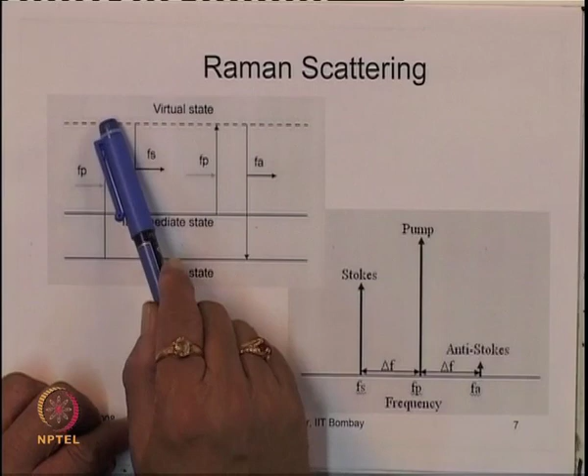So let us look at the very basic phenomena of Raman scattering. The Raman scattering phenomena is as follows: if you consider a material which has energy levels, you have a ground state, a virtual state, and intermediate states which are essentially vibrational states. If we excite the material from the ground state to this virtual state, these excited electrons will jump to this vibrational state, and in this process a frequency is emitted.

This emitted frequency is smaller in value compared to the excitation frequency, and the difference in energy is essentially fixed. That means there is a fixed change in frequency compared to that with which the material is excited. So this frequency at which energy is supplied to the material is called the pump, and the frequency at which energy is released is called the Stokes.

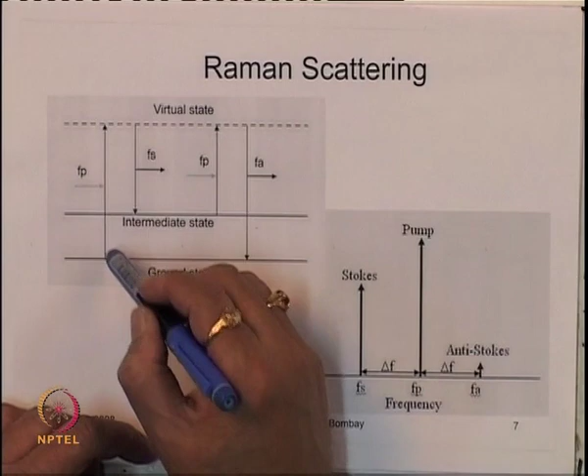Of course, it is not that the entire energy gets converted into this frequency. About 10 to the power minus 6 of the total intensity of the light impinging on the material comes out in the form of the Stokes frequency.

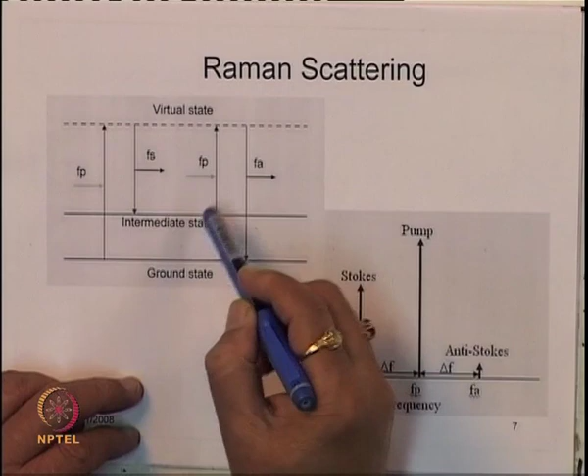There is also a possibility that if energy is supplied to the material corresponding to this frequency, and if you can make this transition possible, then one can get a frequency which is called the anti-Stokes frequency compared to the pump. This frequency will be of higher value, again by the difference corresponding to the energy difference between the vibrational state and the ground state.

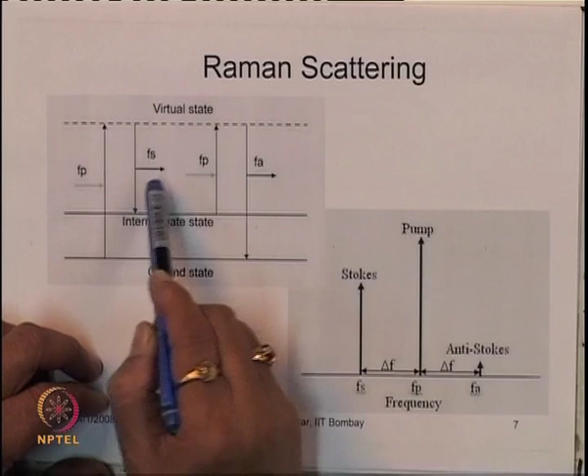So that is the basic phenomena of Raman scattering: if a material is exposed to a beam of light, a small fraction of that energy is converted into frequencies which are the Stokes frequencies, or the frequency is downshifted compared to the incident frequency by a fixed amount corresponding to this energy difference.

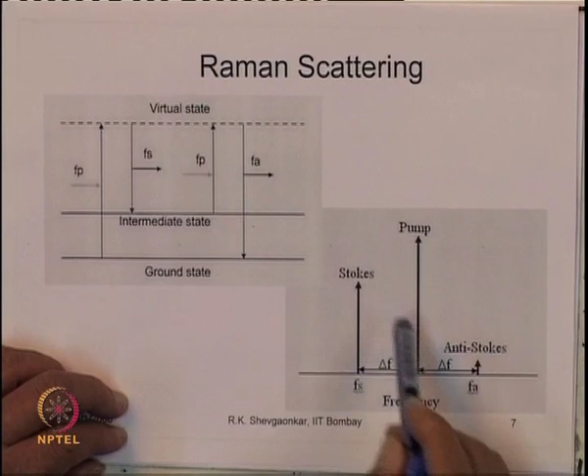So if I look spectrally in the spectral domain, if I excite the material with this pump frequency, we get a Stokes frequency generated which is smaller than this, and this decrease in frequency is a parameter of the material, because it corresponds to the energy difference between the vibrational state and the ground state.

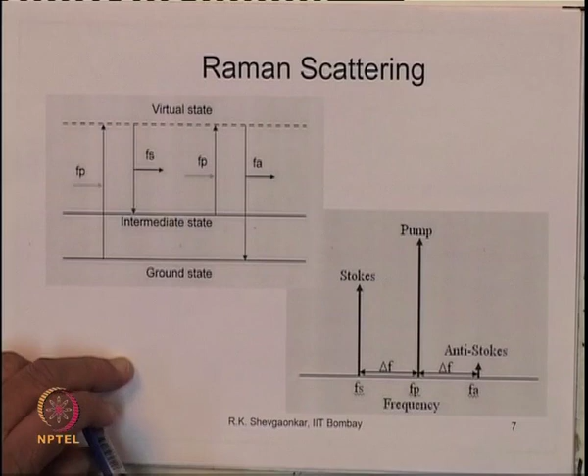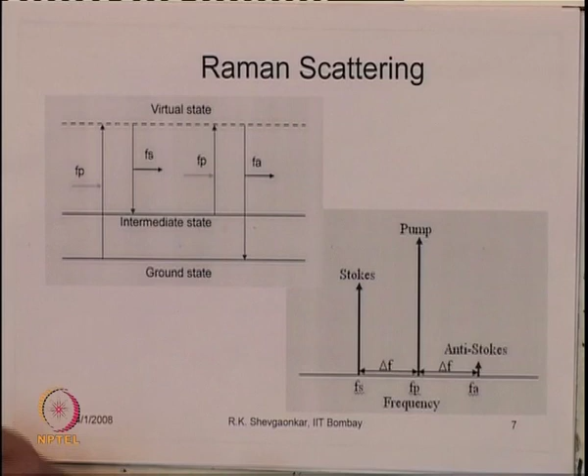Similarly, if you could excite this mechanism, one can create the anti-Stokes, for which the frequency would be higher compared to the pump frequency. Of course, the Stokes mechanism is more easily realizable; the anti-Stokes requires special systems. We are going to focus essentially on the Stokes mechanism.

That means if the material is exposed to a pump, we will generate a frequency which is the Stokes frequency, downshifted with respect to the pump frequency by a fixed amount. This difference, as we said, is decided by the material. So every material has this frequency fixed, which is a characteristic of the material.

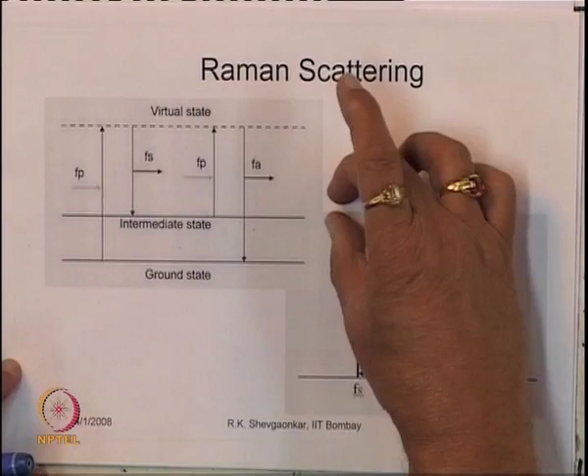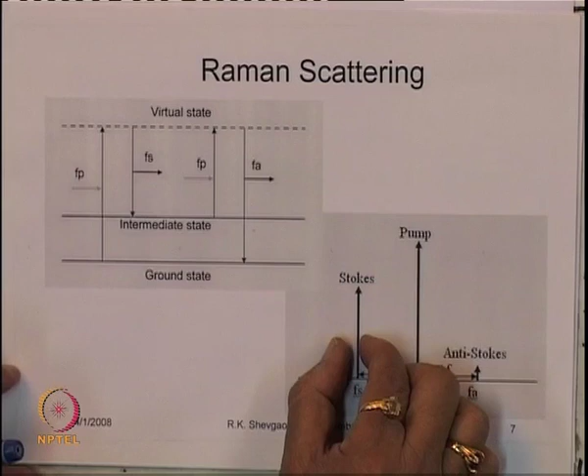If I look at the material glass, you will see that the vibrational energy states are not as discrete as shown earlier; actually it is a band. So it is more like a diffuse band, and this transition can take place anywhere within that band. So we do not get a monochromatic frequency even if the pump is monochromatic; instead we see a band of frequency generated when the material is excited with a monochromatic pump.

Now since the frequency we are interested in is not an absolute frequency but a relative frequency with respect to the pump, one can get a relative spectrum for Raman gain. So the frequency characteristic, the gain spectrum of the Raman process, looks like that, and the parameter which decides this is called the Raman gain coefficient. This spectrum is drawn in the relative frequency domain, where the pump is at relative frequency 0, and the frequency differences are plotted in terahertz.

So now what we are seeing here is that this gain peaks somewhere here, and this is not an absolute frequency at which we have amplification or gain from the system. This is the relative frequency compared to the pump. So if you shift the value of the pump, the absolute frequency also will shift, because this difference will be constant.

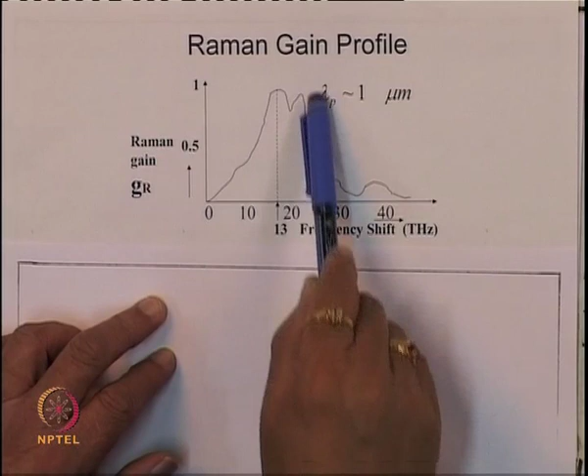So for glass, if you take the pump around 1 micrometer wavelength, then we see that the peak of this Raman gain is approximately 13 terahertz away from the pump frequency, or we say that the signal is 13 terahertz downshifted compared to the pump frequency, whatever value you take. Now if you convert this 13 terahertz into approximate wavelength, it will turn out to be about 100 nanometer kind of wavelength approximately.

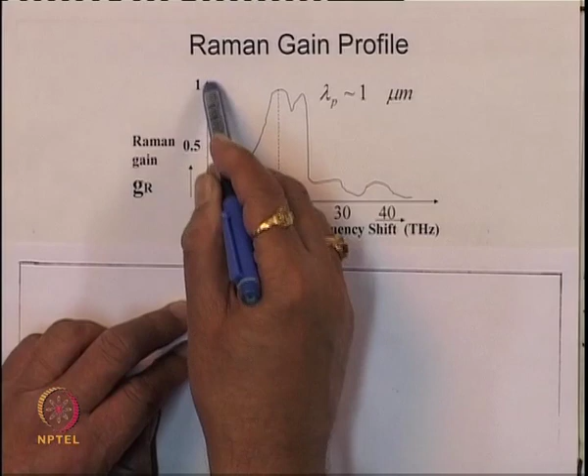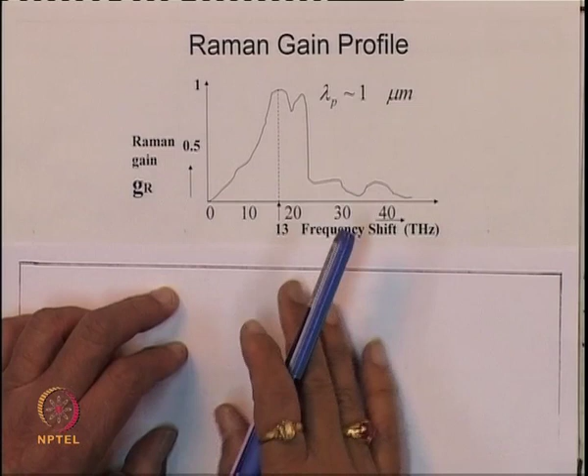But the important thing to note here is that we have a band which is created because of the Raman scattering. So it is not only one frequency which is excited; here we have more power, but actually there is a large bandwidth over which the frequencies get generated. That is the phenomena essentially we want to exploit now for broadband amplification. We have also seen that this turns out to be almost about 13-20 terahertz, so this can give a very wide band amplification even if we consider this range.

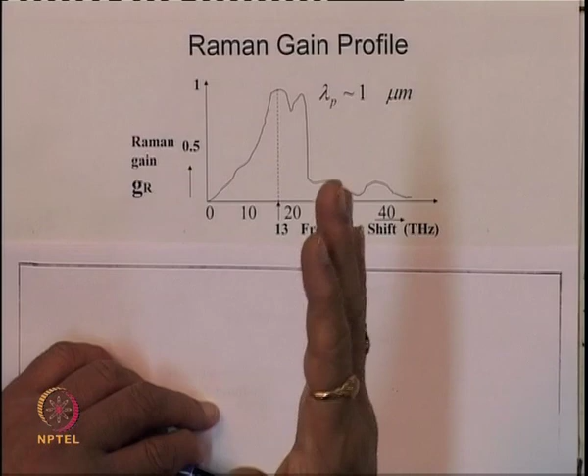So what we are now going to do is make use of this phenomena of Raman scattering to see a broadband amplification which is not wavelength specific, but which is relative wavelength specific. That means if the pump wavelength is changed, then this frequency also can be changed.

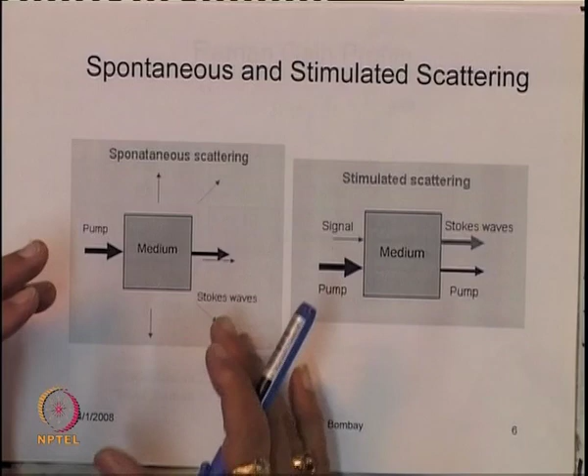Now when I am looking at this phenomena, as we know, you have got a basic mechanism which is the amplification mechanism or frequency conversion mechanism. If you do not put any seed signal inside, then this phenomena is like a spontaneous phenomena. So we have spontaneous Raman scattering: if we have a material, and you pass an intense beam of light through this material, a very small fraction of that power actually will get scattered, and that is the Stokes wave which we talked about. That phenomena is a spontaneous phenomena.

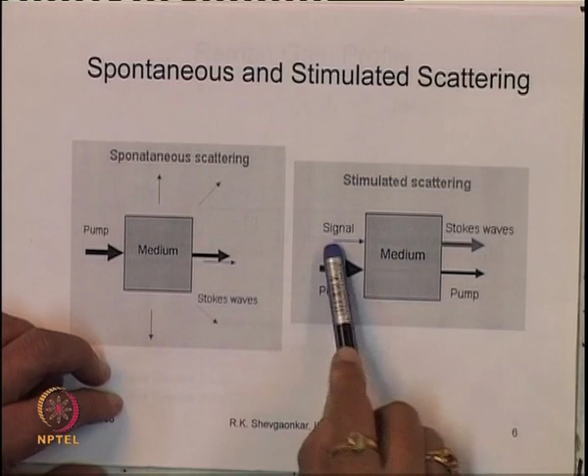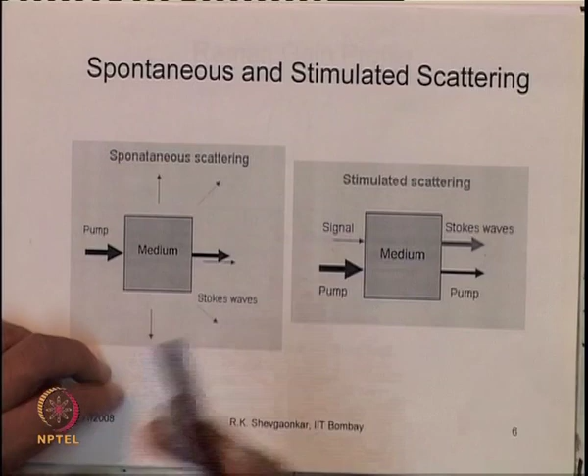But as we know, if we have another signal pass through the material along with the pump, and this signal frequency is such that it coincides with the peak of the Raman gain, then this process can be converted into a stimulated process. So when the pump beam propagates through the medium, there is another frequency generated which is downshifted compared to the pump frequency. But if we put a signal along with this, then coherently the power from the pump can be transferred to this signal, because the signal now is aligning with where the amplification is maximum.

So this process, by using the stimulated mechanism, can be used for the amplification of the signal. Essentially we can create what is called the Raman amplifier, a broadband amplifier, and the band will be decided by what is the pump wavelength. So as we saw, if I change the pump wavelength, then the entire band will be 13 terahertz down with respect to the pump wavelength. So by choosing a variety of pumps, we can find the amplification in any desired band we like.

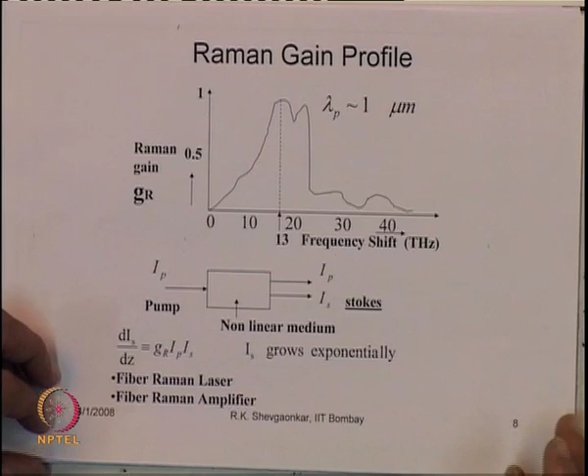So that is the basic process essentially we are investigating here now. Raman scattering phenomena, for glass, gives you a frequency shift which is about 13 terahertz away from the pump frequency. So once we are having an amplification mechanism where a stimulated process is there, we can create what is called the Raman amplifier, and then with proper feedback we can also create what is called the Raman laser. So let us do the analysis of this in a more simplified fashion, and then also try to find out what are the threshold powers which you require in the pump to get the amplification into the Stokes wave.

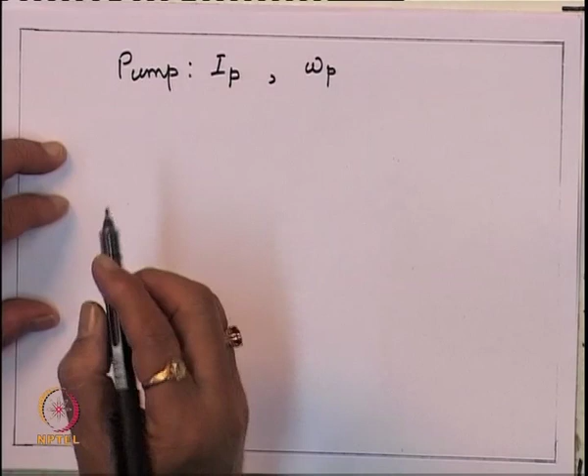So first of all, as we know, once you are having a gain coefficient like this, the radiation will grow exponentially with the gain constant which is given by the Raman gain. So let us say we are having the frequency and intensities corresponding to those frequencies. So we have a pump which has an intensity I_p and a frequency omega_p. Similarly, let us say we have a signal which has an intensity I_s and the frequency is omega_s.

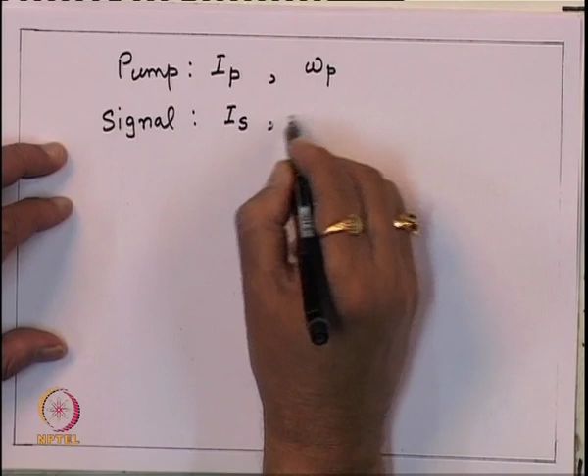Let us say on the fiber we have the loss, and the attenuation coefficient for the pump wavelength is given by alpha_p, and for the signal it is given as alpha_s. So now you see when the pump and signal travel on the optical fiber, you are having a mechanism which is the Raman mechanism which grows the signal, and since the power is going to get transferred from the pump to the signal, the pump power will reduce, and power will reduce in both pump and signal due to the losses on the optical fiber.

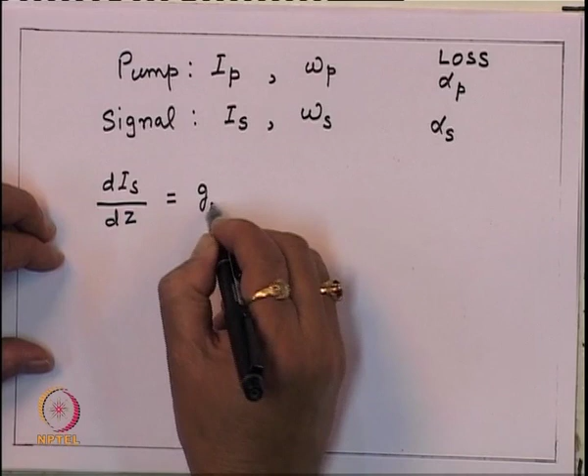One can write down the simple differential equations for this. We have the change in intensity as a function of z, which is distance on the fiber, that is equal to the gain coefficient, the amplification coefficient, which is the Raman gain coefficient multiplied by the pump power I p, times I s, and then there is a loss, minus alpha s times I s.

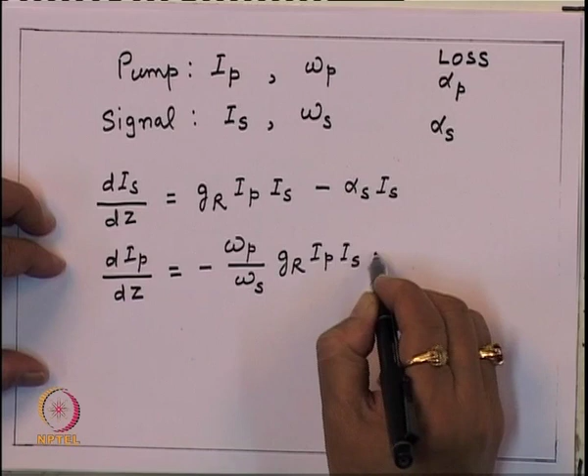Since the signal is growing and power is coming from the pump, the pump will attenuate. So the differential equation for the pump would be d by dz, that is equal to minus omega p by omega s, Raman gain, I p, I s, minus alpha p times I p.

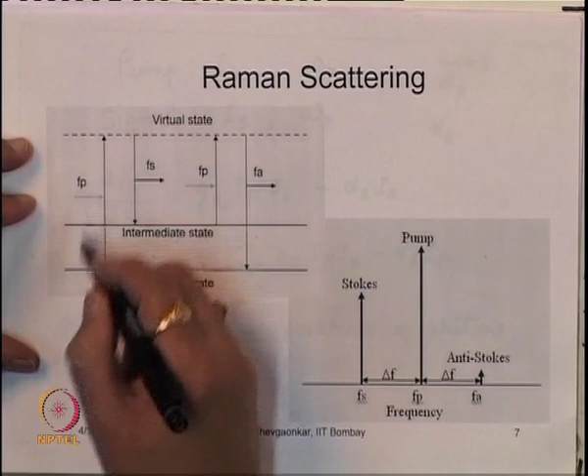This factor which you get here comes essentially from conservation of photons. Because as we know in the Raman process, certain transitions are made from this to this: a photon is absorbed inside the material, goes inside, and when it comes out, this much energy has been taken away from the photon, but the number of photons which are gone inside are conserved.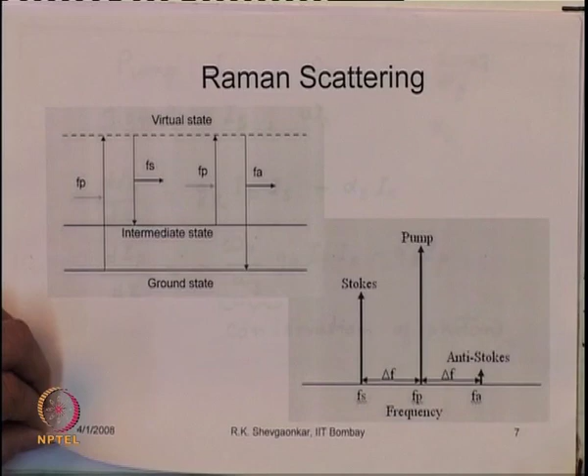So if conservation of photon has to take place, then the d by dz of the number of photons combined together in the signal and the pump, that change as a function of distance has to be 0. The intensity for the pump, the number of photons if I divide by the frequency, plus if I take the signal intensity and divide by the frequency, that gives me the total number of photons. So the rate of change of these photons with distance should be equal to 0.

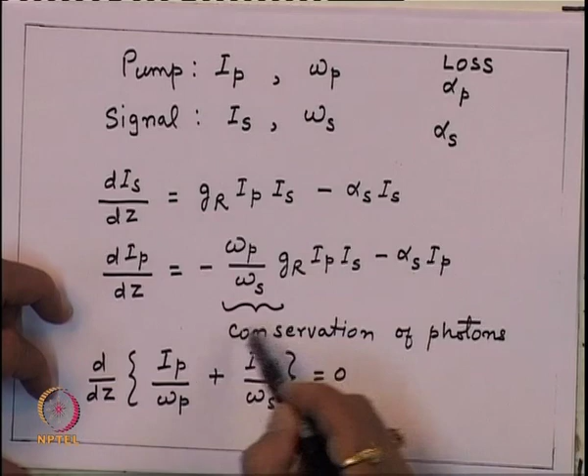From there essentially we see that this coefficient has to be multiplied by this factor, which is omega p by omega s.

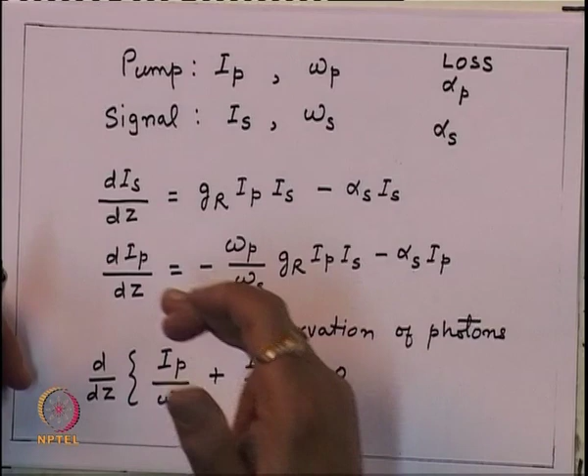To analyze this, first one can assume that the signal is very small compared to the pump. Even if power is transferred from the pump to the signal, the depletion in the pump is negligible. So this term, at least to start with, is not a very dominant term, because the change in power because of this transfer is really small. So we can say that pump depletion is neglected.

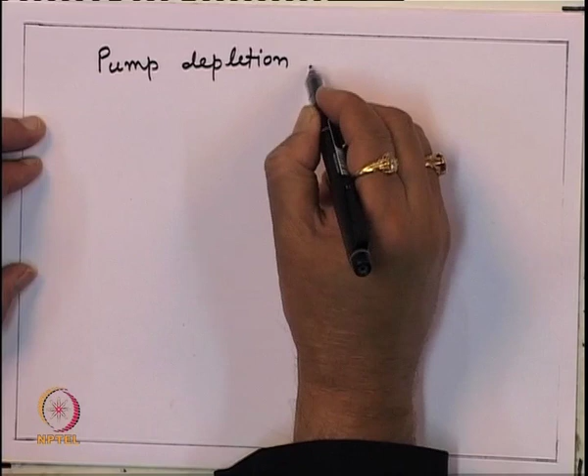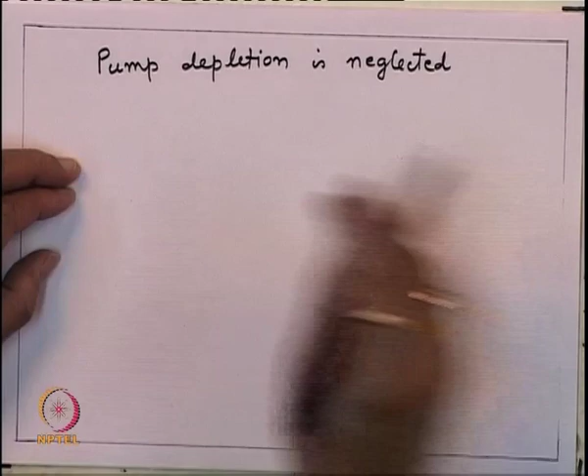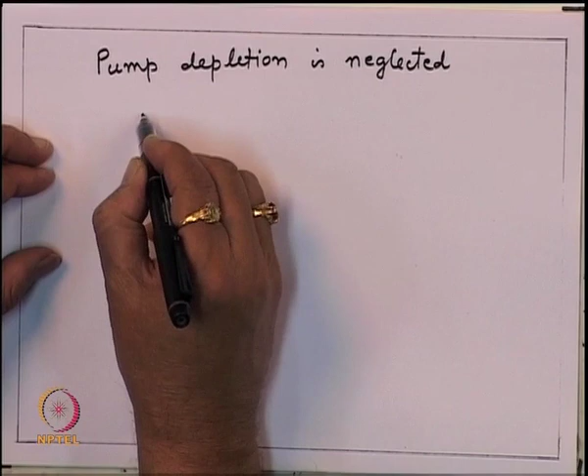If I do that, then this term is not there, so the solution of this is very straightforward. From here, alpha p is the pump attenuation constant. So we have I p as a function of z, that is the initial pump value with an exponential decay, which is minus alpha p times z.

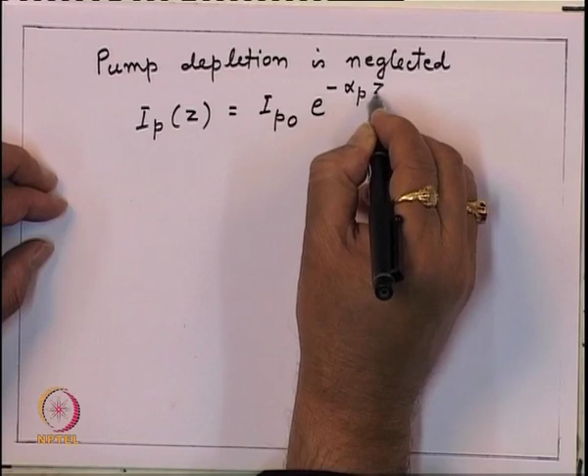I can substitute this I p into this to get the amplification of the signal. So the equation for the signal is d I s by d z, that is equal to the Raman gain coefficient times this quantity I p, which is I p0 e to the power minus alpha p z, times I s, minus alpha s times I s.

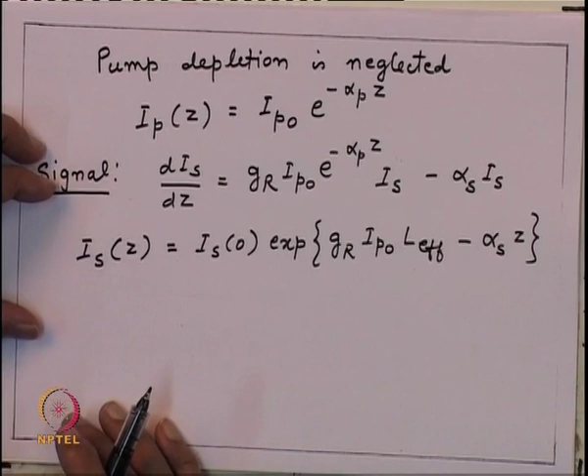Again, as we have introduced the concept of the effective length on the optical fiber, meaning there is a length over which the power is substantial, one can write the solution to this equation: I s as a function of z equals I s at 0, exponential of this coefficient g r, I p0, L effective, minus alpha s times z. Where, as defined earlier, L effective, the effective distance, equals 1 minus e to the power minus alpha p z, divided by alpha p.

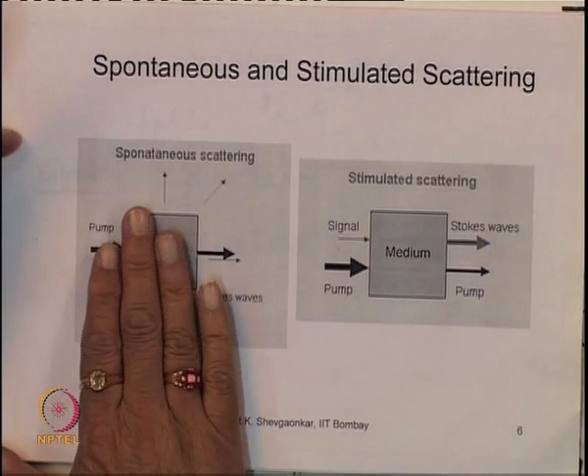Now if you do not put any seed inside this material, so if I take a system like this, essentially what we are saying is that because of the thermal emission, spontaneous emission is like one photon created in every frequency bin, and then that photon goes through this gain process, so there is amplification which takes place.

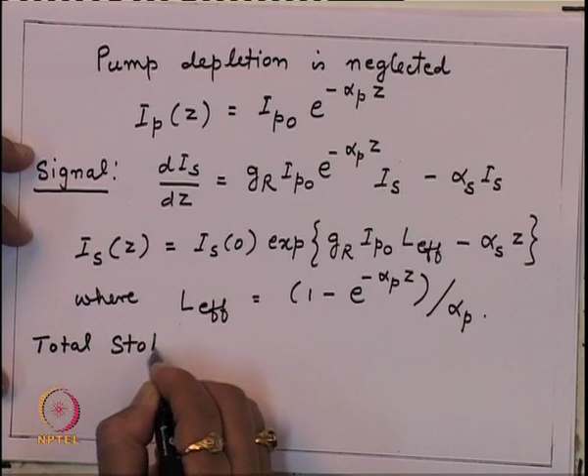If I wanted to find out what is the total power inside this Stokes wave which is generated, I can just take this expression and integrate over the frequency, which will give the total power generated inside the Stokes wave. So we can get here the total Stokes power as a function of z, that is if we integrate over the frequency.

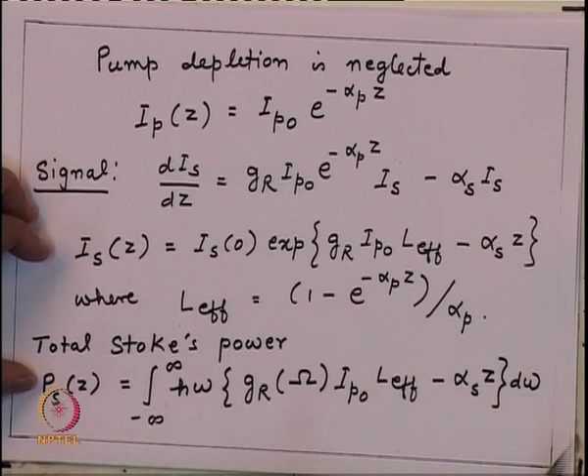h cross omega with the Raman gain, and here we are looking for a frequency which is the relative frequency. So the relative frequency, let us say, is given by capital omega, I p0, L effective, minus alpha s z, d omega. So what we have done is take just this and integrate over the frequency to get the power generated in the Stokes wave, where this capital omega is the relative frequency.

Which is omega p minus omega. So, what one can do now is that since the Raman spectrum is peaky, the spectrum is something like this, we can define some kind of effective bandwidth which the Raman spectrum has.

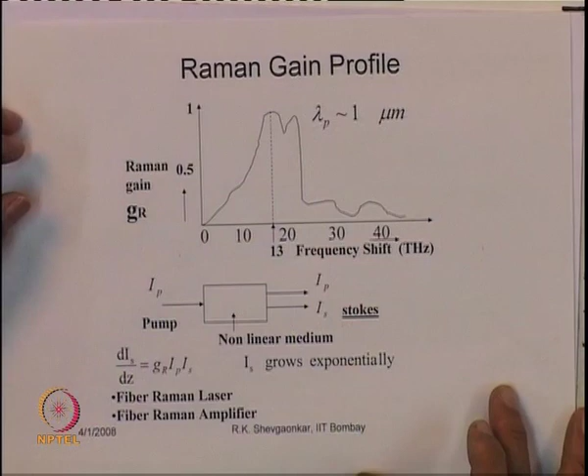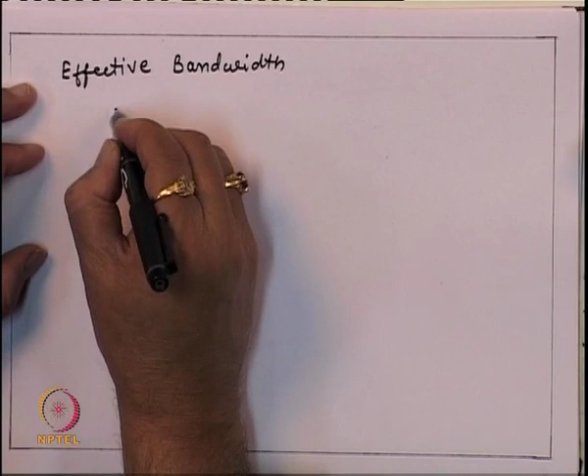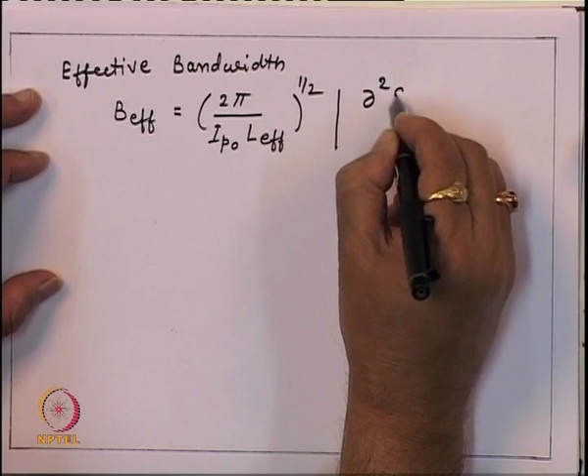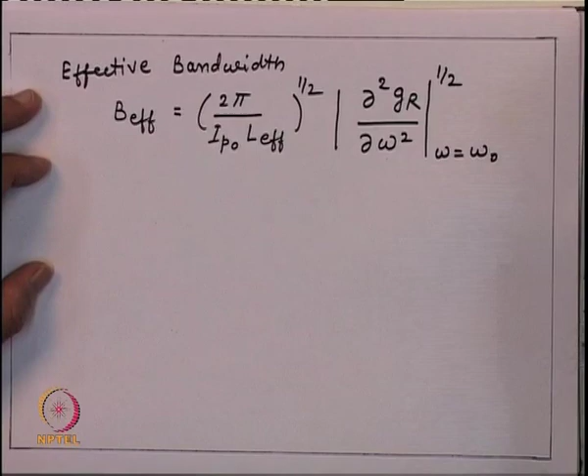So, one can define the effective bandwidth of Raman spectrum. Let us call effective bandwidth B effective, and that is given as 2 pi divided by I p0 L effective, the power 1 by 2, d2 gr by d omega square, root at omega equal to omega 0, where omega 0 is the frequency, the location where the Raman scattering is maximum.

Then if you are considering only the spontaneous emission, we are assuming that every frequency bin is having one photon. So, the input of the fiber, the intensity is I s 0, and that is simply given by h into omega s multiplied by the effective bandwidth, because that is the energy which we got in each frequency bin. If I multiply by the effective bandwidth, that is the total power I have, which is going inside the optical fiber.

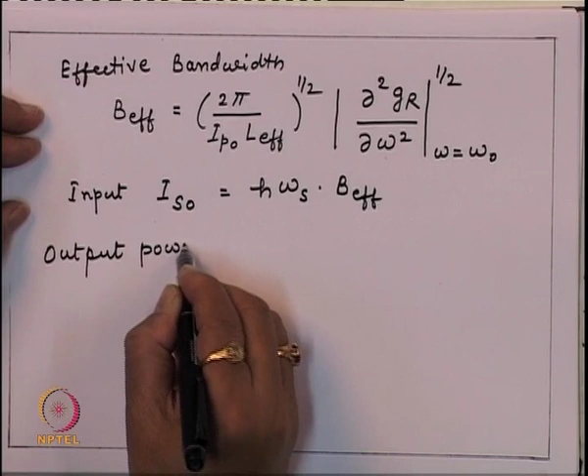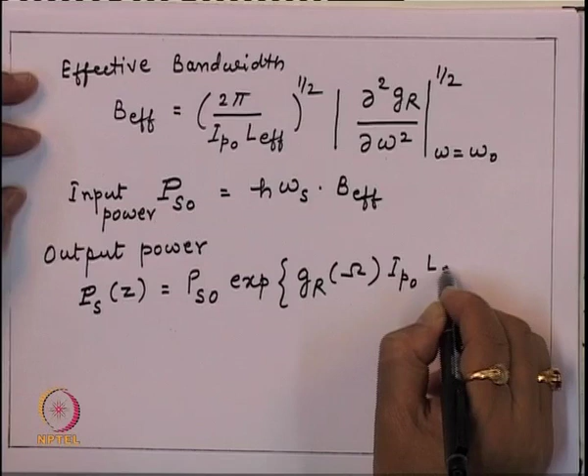So, then at the output we will get power, that will be I, now make it P for the power, P s of z, that is equal to P s 0 -- because this also, since we are multiplying here by this, let us call this as the power. So, this is power. So, P s 0 and then you will get from the previous expression, we integrate this to get the total power, which will be I p0 L effective minus alpha s z.

Now, there is a parameter called the Raman threshold, and this parameter is the power level at which the Stokes power becomes equal to the pump power. As we know, when this amplification is taking place, the material is excited only with the pump, and as the signal starts travelling inside, the spontaneous photons which were there get amplified. So, the power now gets transferred from the pump to this spontaneous emission or rather Raman spectrum, and then one can ask what should be the input power level in the pump, so that the pump and signal become equal for the given length of the optical fiber.

That power level is what is called the threshold power for Raman. It does not mean that unless the power exceeds the Raman threshold, the Raman amplification or Raman scattering is not taking place. It is simply saying that at that power level, the power in the Stokes will become equal to the power in the pump. But even if one is operating below the threshold level, some power is going to get transferred to the Stokes waves. So, this process will take place at every power level. Only thing is, when the power increases in the pump, then the Stokes power will become as large as the pump power.

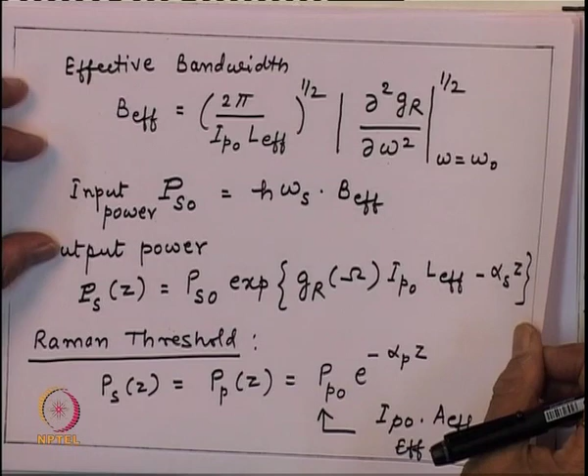As we know, the loss profile for the fiber does not change very significantly. If you are around the 1550 nanometer range, then the loss coefficient for glass at 1550 nanometer and 100 nanometer below that will be approximately the same. So, one can very safely assume that alpha p is approximately equal to alpha s.

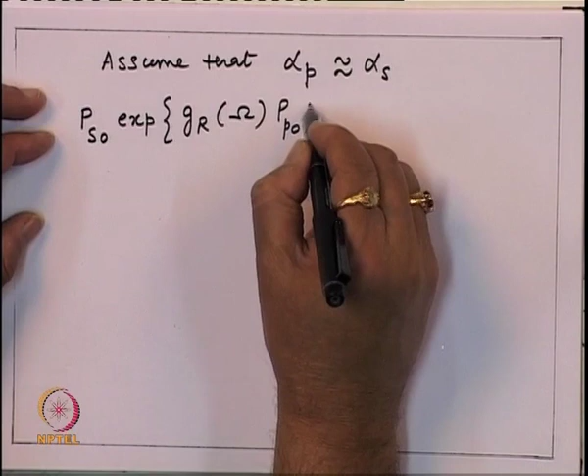So, what we can do is make this approximation and then use this condition to say that now the signal power, which is the Raman gain, P0 in the pump, L effective divided by A effective, that should be equal to P0. So, from here one can get the threshold power in Raman gain, which is GR P0 L effective upon A effective, that is approximately equal to 16, for the parameters which you have chosen.

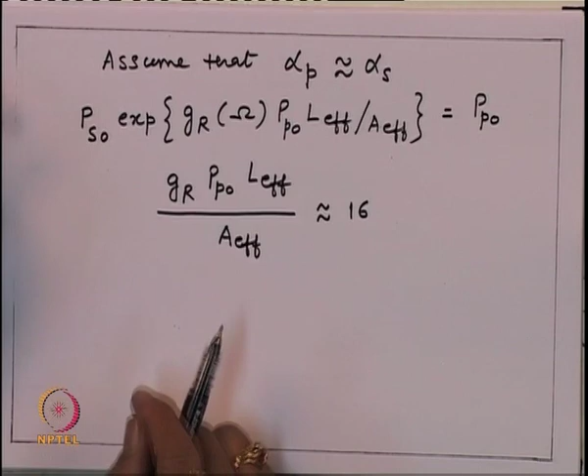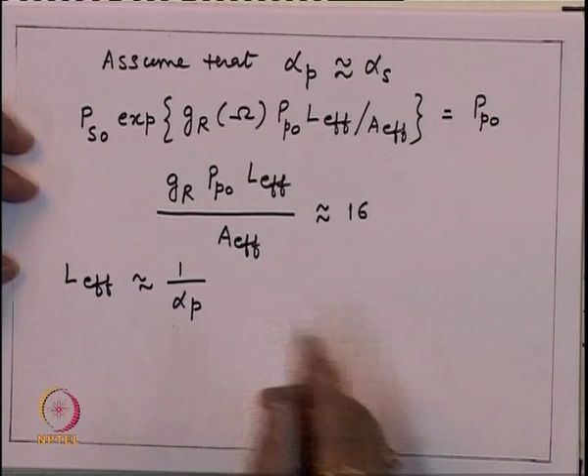Now, if you take the typical optical fiber parameters, the L effective is approximately 1 upon alpha p, and if you consider this quantity to be about 0.2 dB per kilometer, this will lead to L effective approximately about 20 kilometer.

The Raman gain coefficient is of the order of about 10 to the power minus 13 at lambda p equal to 1 micrometer, and A effective, which you see for a typical fiber, is of the order of about 50 micrometer square. So that gives us the P0, the threshold power. So this P0 threshold is approximately equal to 600 milliwatts.

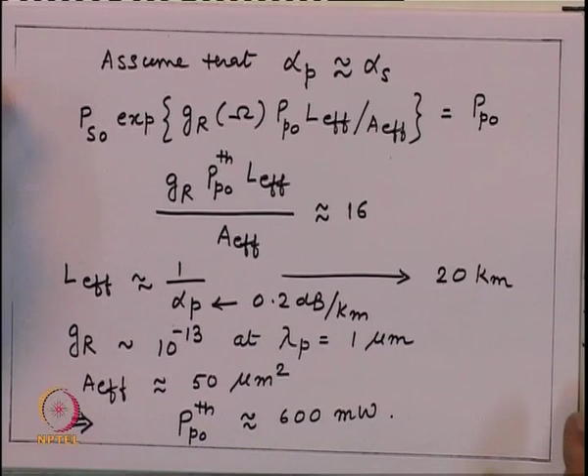That means if I consider a single mode optical fiber and put few hundred milliwatts of power inside the fiber, then the Stokes frequencies which are generated will have power equal to the pump power. Now, if you consider a communication system which is single channel, typical power is going to be of the order of a few milliwatts. So there is no possibility of really reaching this threshold condition, meaning the Stokes wavelength power will never be equal to the pump power.

However, imagine a situation when we have a WDM system and a large number of channels are transmitted inside the optical fiber. In that situation, the total power going inside the fiber could easily become a fraction of, or comparable to, this threshold. In this situation, the Stokes wavelength will be generated much more strongly compared to a single channel system.

Now, since this phenomena is a natural phenomena taking place in the optical fiber, note that we have not done anything special to the fiber. What we are saying is, if the optical fiber is made of glass, it is a property of the glass that when light travels through the fiber, a small fraction of it gets downshifted in frequency, and that difference will be about 13 terahertz.

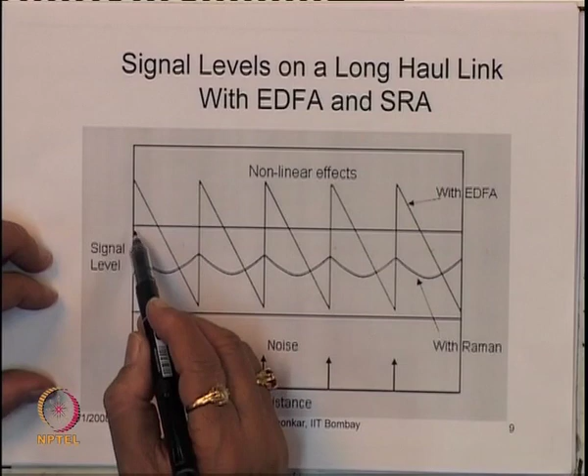But before we get into that, let us look at the mechanism of amplification, the distributed amplification. So, as we have seen, if I had this link length from here to here, and if I just wanted to maintain the signal level, whatever input signal is, its level should not change, it should remain just like this as a function of distance.

What would happen in a typical optical link where we use EDFA? The signal will attenuate because of fiber. Then we will put an amplifier which is a discrete amplifier. Suddenly the power will jack up, then it will go on attenuating, then again put amplifier here, jack up, and so on.

So that is the typical power profile I will see along the optical link. But if you have a Raman amplification, which is the distributed amplification, we can get a mechanism like that. So if I create the Raman gain inside this, the power does not decrease significantly and then jack up. It sort of more or less maintains at a certain level, whatever level we are really looking for. So you see that because of distributed amplification, nowhere the signal was over amplified, nowhere it has gone below the required level also. So you got a reasonably good maintenance of the signal, compared to the EDFAs.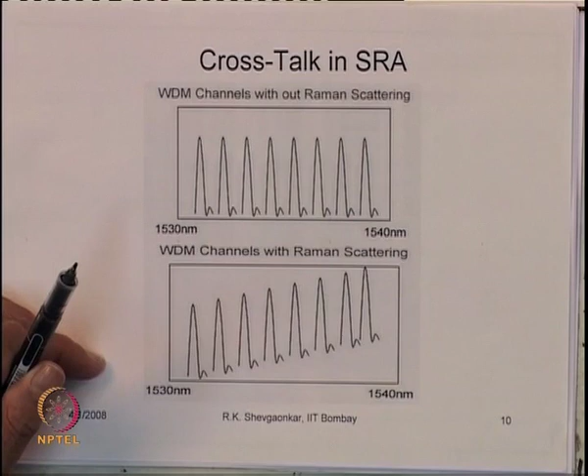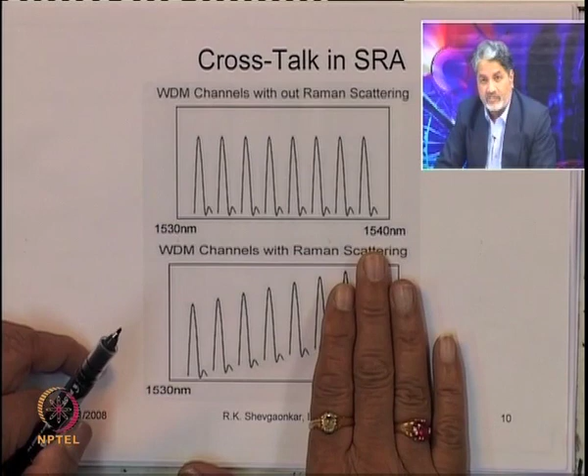But if the Raman effect is present, then as we have seen, every high frequency now is going to put power into low frequency. So this puts power into this, all of that. This puts power into this. So systematically you see that the power in the lower channel has gone up and power in the high channel has gone down. So all channels without Raman amplification would have emerged like this.

Now you see there is a systematic trend of having higher power into low frequencies compared to the high frequencies. And that is the phenomena which is a crosstalk, which is created in the WDM channel, because of the Raman scattering.

So one can then ask, if this phenomena is going to take place in the optical fiber, what kind of power penalty would be there to get the same performance in the WDM channel? So let us do a simple analysis.

Let us say we have n channels, WDM channels, which are equispaced, and as a standard thing we take about 0.8 nanometer. The Raman gain bandwidth is approximately 125 nanometer, which is about 13 terahertz. The Raman gain coefficient is given approximately 6 into 10 to the power minus 14. So that is the coefficient which we get.

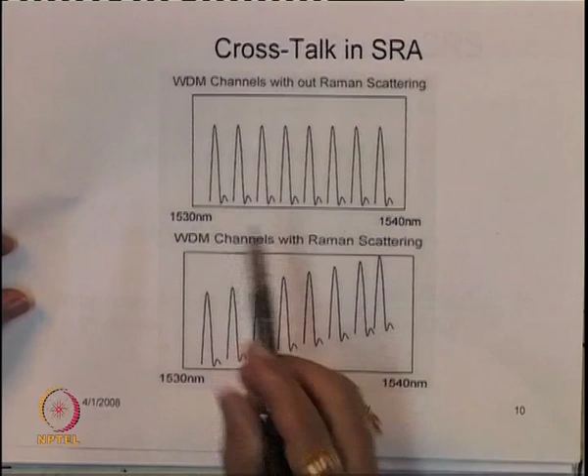So now we see the power coupled from the 0th channel to any ith channel. We are numbering the channels: this is my 0th channel, first channel, second channel and so on. So this 0th channel is going to put power into every channel because of Raman.

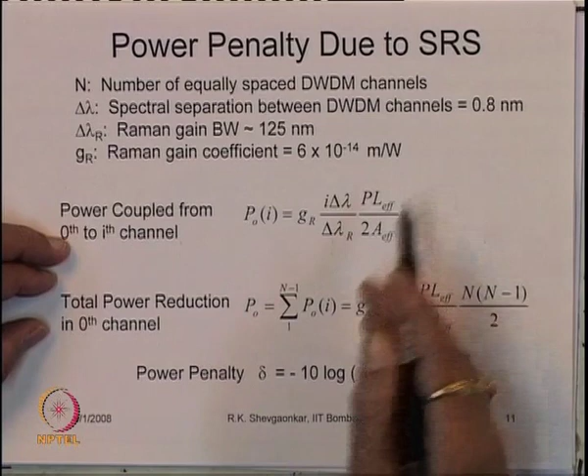So now we see the power coupled from the 0th channel to the ith channel is given by this, the same thing which we derived earlier. So the total power reduction which I am going to get in the 0th channel is given by this expression. Here we have said that this channel is going to supply power to all the channels which are lower than that.

Then one can ask a question, how much power do I have to increase in the 0th channel, so that at the output I will still get the minimum power required in that channel from a signal to noise ratio point of view, and that is what is called the power penalty. So if I take this reduction in the power in the 0th channel, the change in power, 10 log of that is what is called the power penalty.

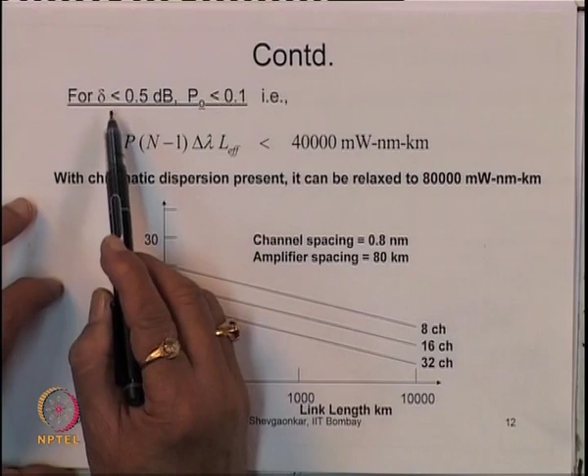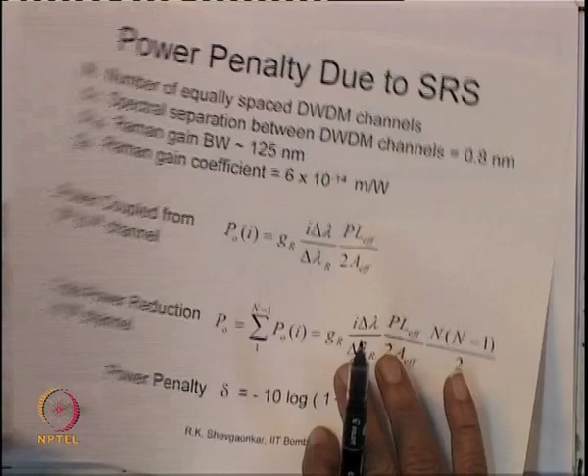So we can get the power penalty in the Raman channel, and then we can put certain numbers here to see that if I want the power penalty to be less than about 0.5 dB, then for this power reduction which is less than 0.1, you get this quantity from here, which is the number of channels n, and that quantity essentially turns out to be approximately this.

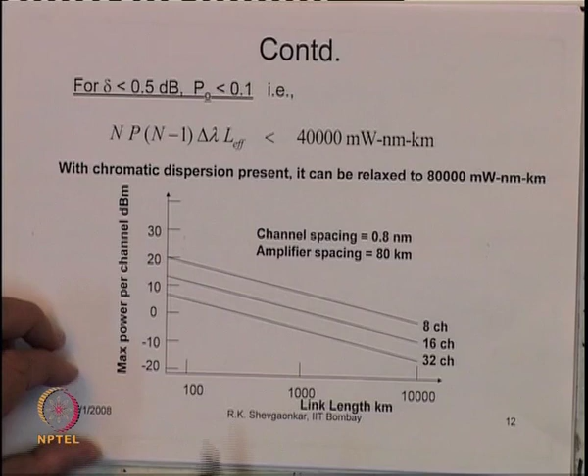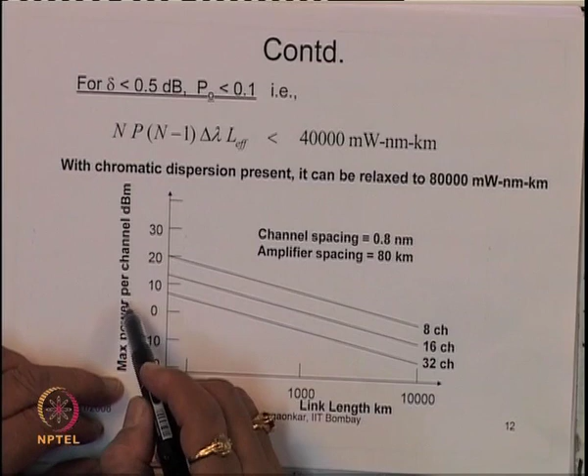With chromatic dispersion present, this may be relaxed to about this quantity, not 4,000, not 40,000, but about 80,000. Now what we see here is that if I plot this as a function of the link length for different WDM channels which are propagating, that is the maximum power per channel in dBm I can transmit to avoid the Raman coupling between different channels.

So if I want to have a power penalty less than this, then each channel should be maintained below a certain power, so that it does not draw much power from the lower channels or high frequency channels.

So you see here this plot which is as a function of distance, the link, and as you see, as the link length increases, the power per channel goes on decreasing. So you cannot have more power than this at any point of time.

So the channels, for the channel spacing and number parameter which we have given here, that is the typical sort of characteristics which you will get for the amplifiers.

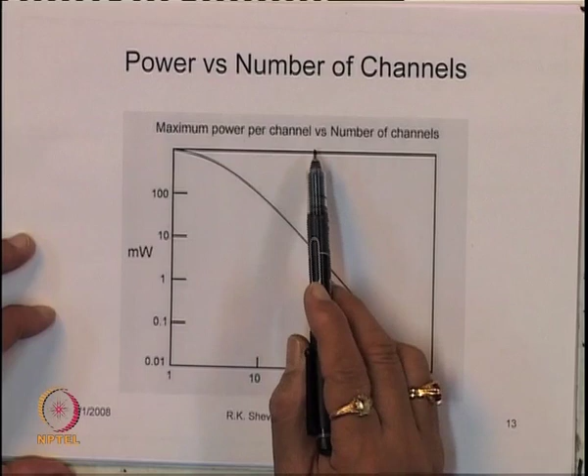The same thing can be plotted in a different way, the maximum power per channel versus the number of channels which you are transmitting, and as you can see, as the number of channels increase, the power per channel goes on decreasing. And since the power per channel is going on decreasing, the link length also decreases.

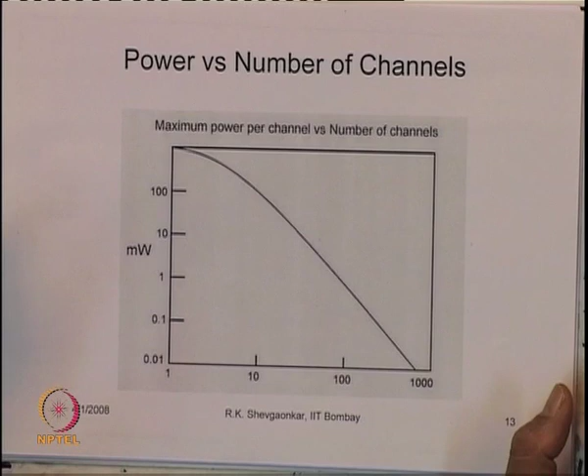Because as we know, from the signal to noise ratio point of view, you require a minimum power to be there on the optical fiber. So essentially, what this phenomena is doing is, in a WDM system, it is going to change the performance of the system. It is going to introduce crosstalk into the WDM system.

So Raman amplification is a distributed phenomena, which is a very good phenomena if you wanted to have a communication which is a solitonic kind of communication, because that is where we are looking for the distributed amplification. But when we are talking about a WDM system, the same Raman effect introduces crosstalk between different WDM channels.

And to avoid this crosstalk, the power in each channel has to be kept below a certain level, and for that, the total power which you are transmitting on the optical fiber cannot be greater than a certain value, and that puts a restriction on the length or the distance between the repeaters, because for a given power, from signal to noise ratio point of view, you cannot send the signal beyond a certain distance.

So you will get now a limitation on the length of the optical fiber. These are the issues which are related to Raman amplification. It is a good mechanism, because the distributed mechanism from solitonic communication point of view is very good, but at the same time it is going to introduce crosstalk also between different WDM channels.

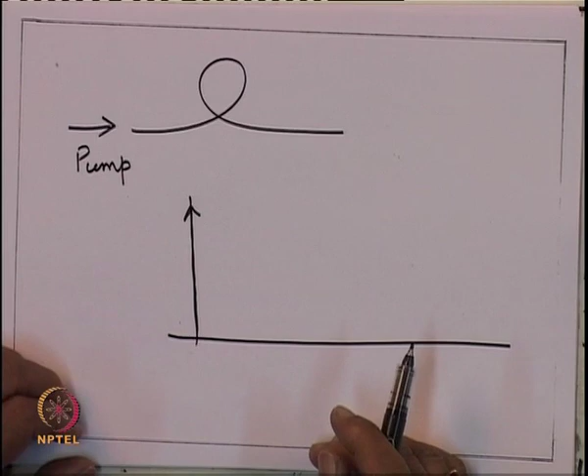You will see that if you start with a pump like this at this location, this pump is going to create a Raman spectrum which will be about 13 terahertz down. But as it keeps on propagating, and if the power level is large, even the power in the Stokes spectrum will be large enough to give a substantial following Stokes.

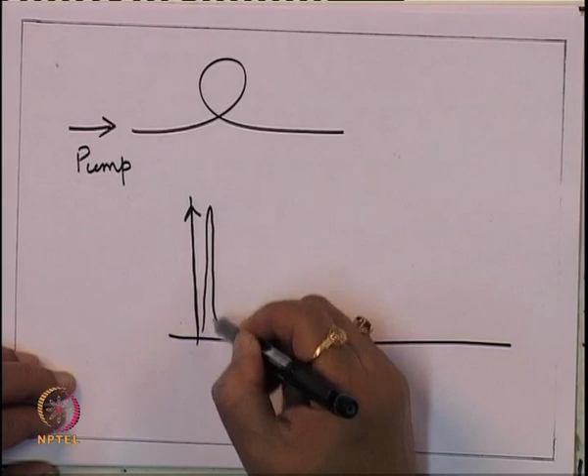So this may generate one Stoke, but here also the power is very large, so it can generate further Stokes. And here also the power is large, so it can generate further Stokes. So you will see something like that.

So if you have a large power put inside the optical fiber, you will see that not only the first Stoke will get generated, but the power will be large enough to generate the second Stoke, then the third Stoke, and so on. So you may get a large spectrum which can actually be obtained from the optical fiber.

So let me summarize what we have done. We have just looked at the phenomena of what is called Raman scattering, and we saw that this phenomena is a material dependent phenomena. Also, this phenomena gives an amplification which is not at a given wavelength, but at a relative wavelength. So by changing the pump frequency, the band of amplification also can be changed, and therefore Raman amplification can be obtained at any wavelength you like.

And the difference between the pump and the signal amplification frequency is fixed for a given material, and for glass that is about 13 terahertz. So by using this mechanism, one can create distributed amplification which is good for solitonic kind of communication, but this mechanism also introduces certain problems for WDM systems, because there is a systematic flow of power from one channel to another channel which introduces the crosstalk.